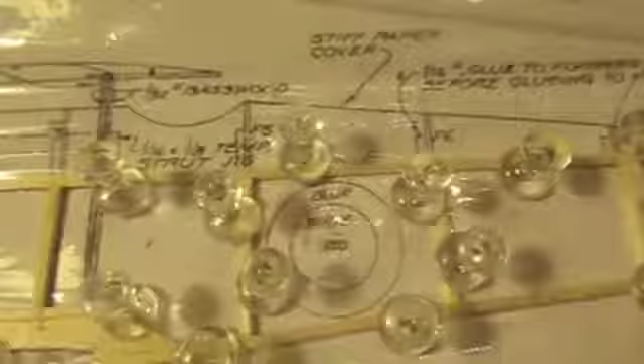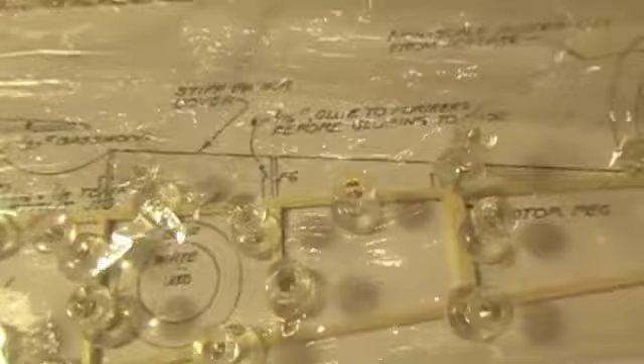And now what I do is I'll pull out these pins, but basically I will fold the plastic wrap right over like this, and I will use this side as a template. So you have sides as identical as you can make them. So I don't pull this out and then build a whole new section. I use the actual wood as the template and lay wood over top. As long as the plastic wrap is there, they won't glue together, and that should make a real nice set of absolutely identical fuselage sides.

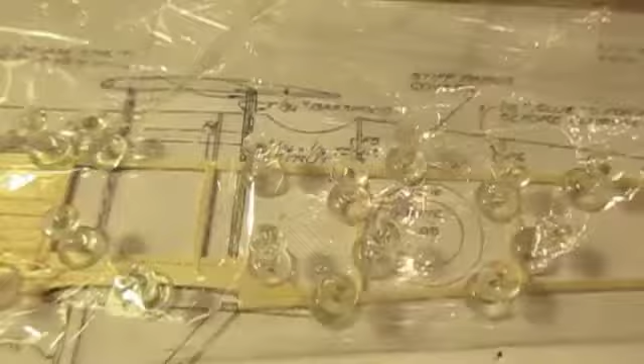The only other thing to remember is these longerons, which are the long pieces, make sure they're the same sort of flexibility, because you don't want your fuselage to get all turned into a banana or something, and if they're of different flexibilities, that might happen. So we'll try to build the other one and we'll see how it does.

Alright, so there's the other fuselage side sandwiched right on top, although you can't really see it. Once this dries, I'll pull them apart, and I should have two identical fuselage sides. And then I'll start cutting out these pieces and start putting cross braces on there and turtle decks, and it'll start coming together and look like a fuselage.

Okay, this turned out just great. Here are my two identical fuselage pieces. They look really good. And on the plan now is this piece that is what the fuselage looks like if you look at it from the top. So the tail stabilizer fits back here. There's the motor peg, and there are these little longerons that go in between these cross pieces. There's the exhaust on either side, and then here's the nose.

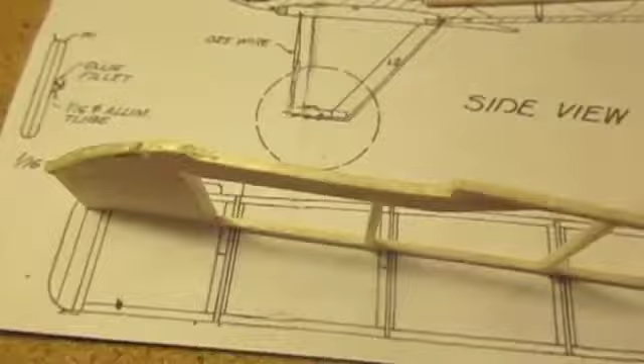So what I'm going to do basically is turn these upside down, put clear plastic wrap on the plan, and affix this thing vertically. And if you look on the plan, down to this longeron, it's straight, it's flat, and then it starts to curve in from this point. So where those two little marks are on either side, I'll very gently hit that with a little bit of the X-Acto blade, and then that will bend and allow me to make the curve from this piece all the way back to the tail, hopefully without doing any kind of damage.

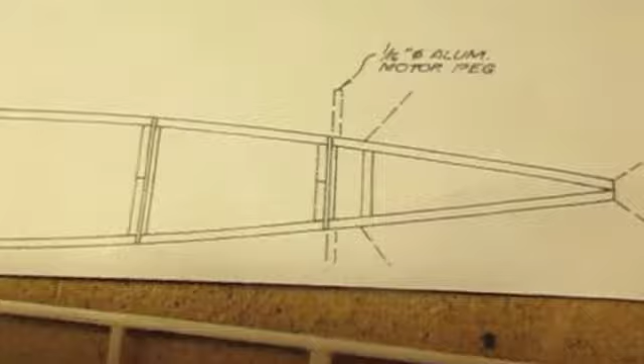On the plan, it's actually a slight curve. On the one I do, it'll probably be just flat on either side, which doesn't bother me. No one will notice, and it'll be fine, and there'll be less chance of warping. That's okay with me.

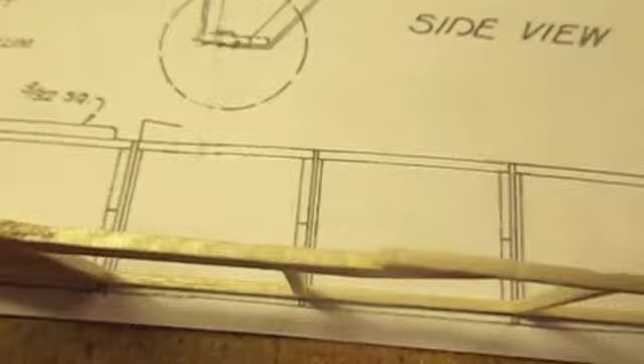But I will set this up and maybe make some right angle gauges or jigs that I can slide up on the edge here, and they'll come up vertically like this and be pinned down, and those will help me hold these longerons in exactly the vertical position. And I'm going to do this upside down, so this is the top, and since that's flat all the way across, it makes sense to turn this over and put these like this on the plan, and then just put the little longerons in the middle right here, the first few.

So I guess it'll be 1, 2, 3, 4. They're all the same size. Cut them all exactly the same, and then slide them in and start gluing this thing together. So we'll see how that goes.

Okay, so I started to put this together, and what I did was cut each of those little longerons that go with the cross pieces, exactly the right distance between here and here, and then I glued the fuselage sides down. You see I pinned them just like I was doing before, and then the front end is lined up there and here, exactly where that is. It should be nice and straight and square.

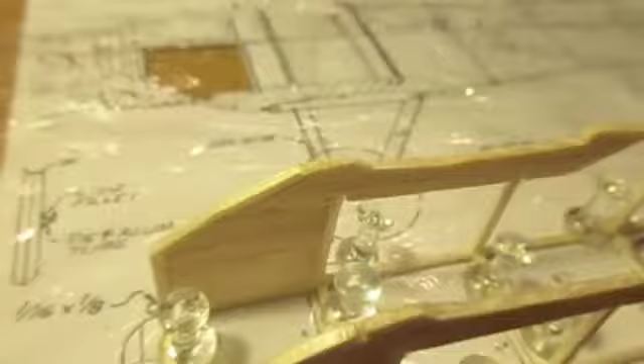And then I also came back and checked with my square to make sure that these are flat and they're at right angles to one another, pretty dang close. A little bit of adjustment can be made when we do the other cross pieces, which will just fit in, for instance, like that, and right there, and right there.

And then from here back, it'll be slightly bent back to the very end, but I'm going to let this dry, and then I will work on the rest of it tomorrow. Hooray, it's a good start.

Okay, so after a night of thinking about it, well, of sleeping, I ended up putting the other little cross pieces in, and it looks like this thing will actually come together pretty nice at the tip, at the end. I did make a couple very tiny relief cuts in these 4 little longerons, but I think I'm going to now put glue on the ends of these, glue on the end here, and actually bring this thing together, and it will follow the path of the drawing really, really well, and I think it will turn out just fine.

So I'm going to glue those pieces in, let them dry, and then I'll start putting all of these things on. So I'm just going to take a little bit of glue here and put it down into those spots where it's going to come in contact, and then a little on the end, right along where that's going to come together, and I should be able to just bring this baby right up against it and bring this side right up against it and slide them in place.